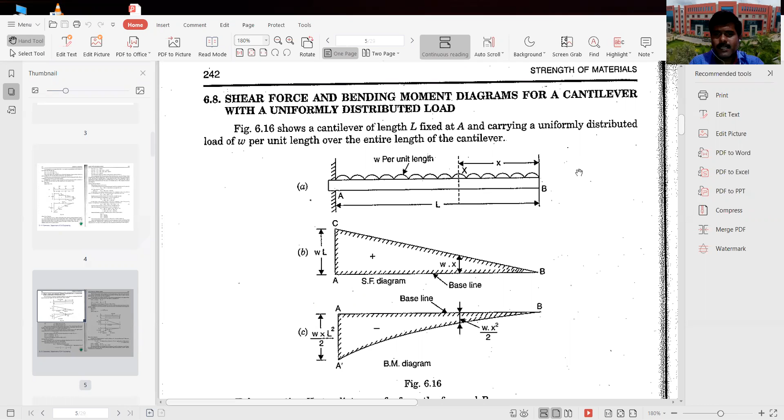In the previous lecture, we discussed the shear force diagram and bending moment diagram for a cantilever beam with a point load. In this lecture, we are going to discuss the shear force and bending moment diagram for a cantilever with a uniformly distributed load.

So you can see this figure: a cantilever beam of length L fixed at point A and carrying a uniformly distributed load of W per unit length over the entire length of the cantilever beam. So this is the cantilever beam which is subjected to uniformly distributed load.

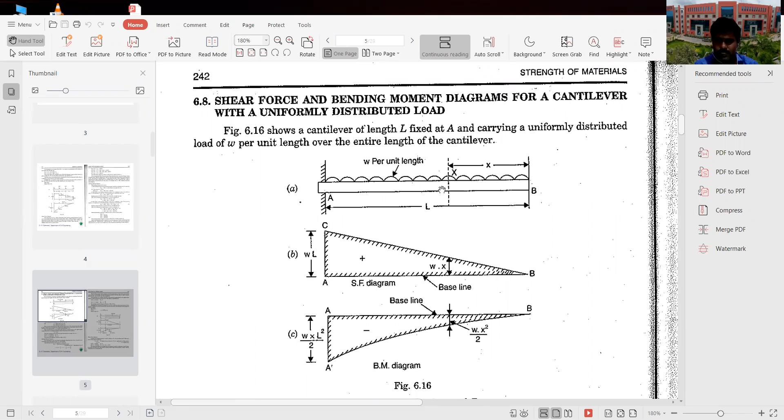So for this we need to know how to draw the shear force diagram and bending moment diagram.

Here you can take a section XX at a distance of X from the free end B. This is the free end and this is the fixed end - fixed end A, free end B. So from the free end B, at a distance of X, you can take a section XX.

Here F of X will be equal to shear force at X, and Mx will be equal to bending moment at X.

Now you need to calculate the shear force. So what is the shear force? Shear force is nothing but when you are taking the section, consider either left side or right side, you just add the force - that force is called shear force. So the algebraic sum of the force acting either left side or right side of the section, if you consider, that is called shear force.

So if you are taking the section here, you just derive the shear force equation, F of X, in terms of X. Wherever the point is - at point B, at point A, here C - wherever you need, if you substitute the distance, you will get the particular shear force value at that point. Now, shear force at X, the XX section, F of X, will be equal to...

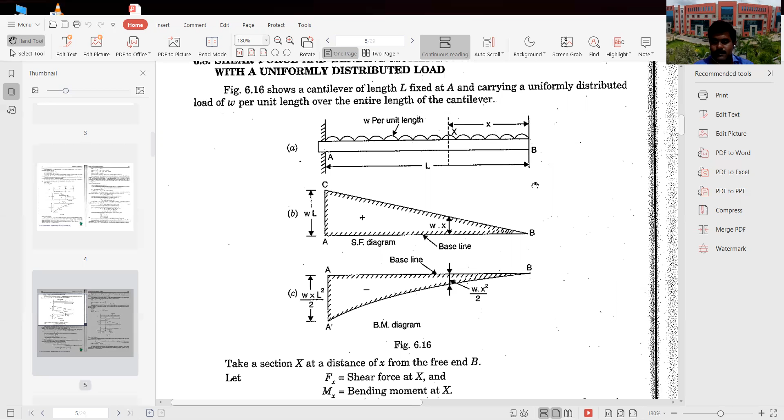So F of X, the resultant force on the right side of the section, will be W into X. Next, you should know whether it is positive or negative. On the right side, the section acts downward, in a clockwise direction. So, as we discussed in earlier lectures regarding sign convention, F of X will be equal to positive, plus Wx.

So the above equation shows that the shear force follows a straight line law. F of X equals W into X, a linear equation in terms of X. Therefore it follows a straight line law.

Now, at point B you need to know what is F at B, the shear force at B. At point A, you need to know what is the shear force at A. So at point B, what is the X distance? Zero.

Hence f of x will be equal to W into 0, 0. At point A, what is the distance? x equal to L, right? So at point A, here 0, here L. So f of x will be equal to W into x, L. So WL.

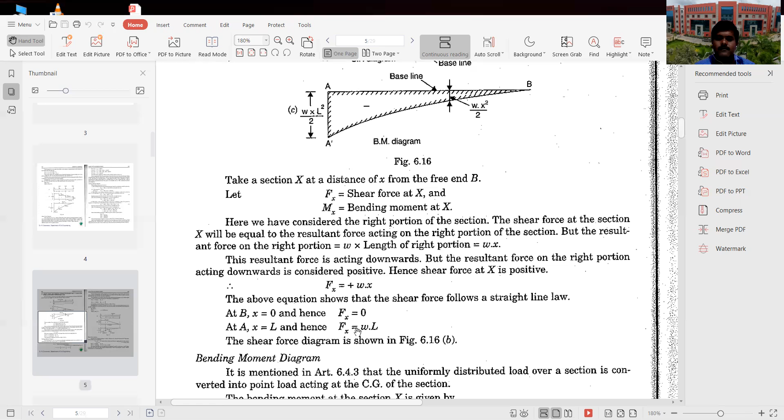So at a distance of x, shear force is Wx. At a distance of 0, at point B, shear force is 0. At a distance of L, point A, the shear force will be W into L. So you can draw the diagram now.

So the shear force diagram you can always draw below the beam, and first draw the baseline AB. Here at point B, the shear force value will be 0. So you can start from 0, and it is Wx, the equation x in terms of x. So straight line, just draw the straight line, and at point A, the shear force value will be WL.

Okay, so this is the shear force diagram. So positive value, therefore you can draw above the baseline, so positive. So when you are calculating the bending moment, you will get the negative value. That's why it's coming below the baseline.

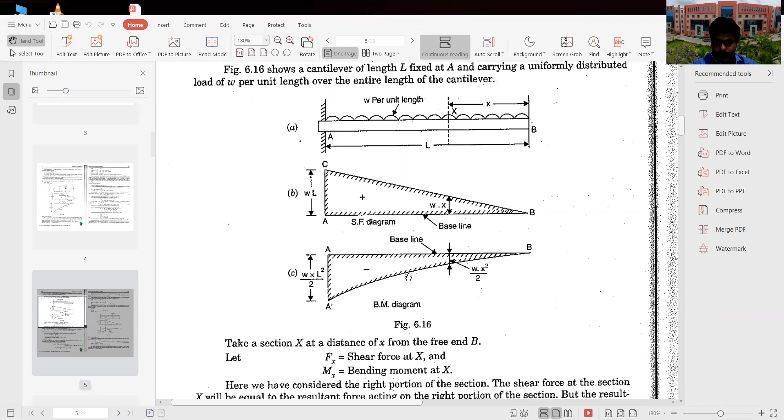So now we can see how to draw the bending moment diagram. So the uniformly distributed load will be converted to the point load, and point load into distance. Load into distance is nothing but moment.

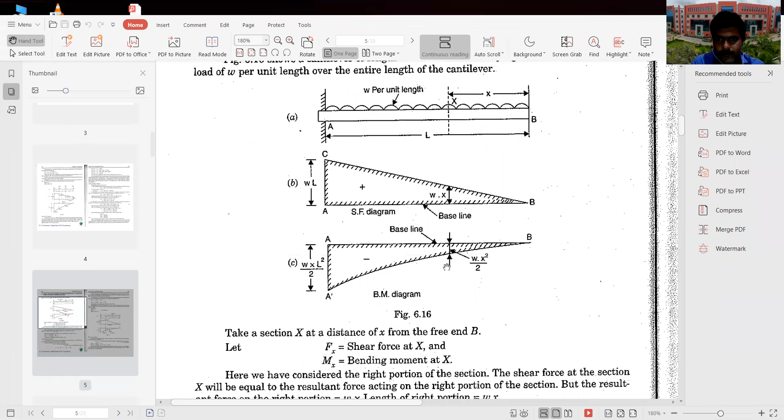So then bending moment at the section xx is given by, okay, you can see here. The bending moment at this section I am calculating. Here what is the load? This UDL converted to the point load, Wx, W into x, and that point load is acting at the center of the section.

So towards this section, if I consider Wx into x by 2, Wx is the load and x by 2 is the distance. The load into distance is the moment at this section. So moment at section Mx will be equal to Wx into x by 2, so Wx square by 2.

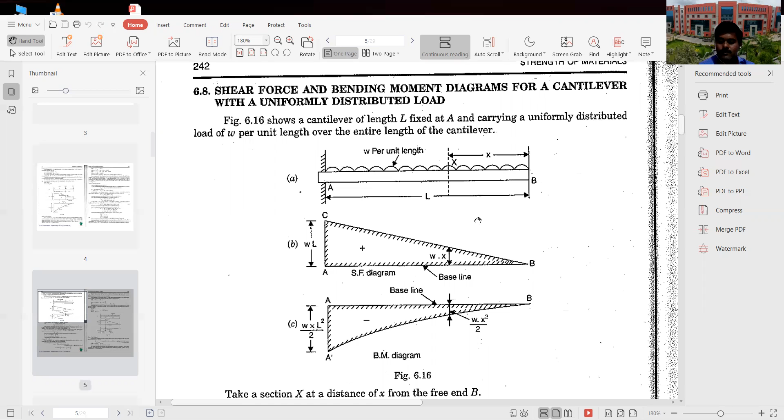So this Wx square by 2 is negative or positive, you have to check. So the section right side has acting downward force. It will come downward like this, like a clockwise moment, and it will lift the beam upward. So the curve will be like hogging, convexity will be at top, therefore hogging, negative bending moment, therefore minus Wx square by 2.

So here you can see the bending moment Mx is equal to minus total load on the right side portion, that is Wx, into distance of CG of the right side, which is x by 2. So Wx into x by 2. Since the beam lifts upward, hogging, so minus Wx into x by 2, which is equal to minus Wx square by 2. So this is the bending moment equation.

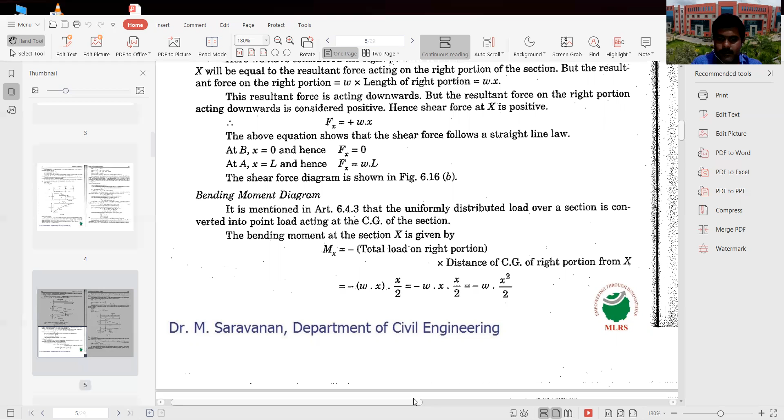Now at point B, if you want point B, the x distance is 0. So 0 square into W, 0 into W, 0. So moment at B will be equal to 0, moment at x will be equal to Wx square by 2, and moment at A will be equal to, at point A the x will be equal to length L, so WL square by 2. Okay, now you can see the diagram.

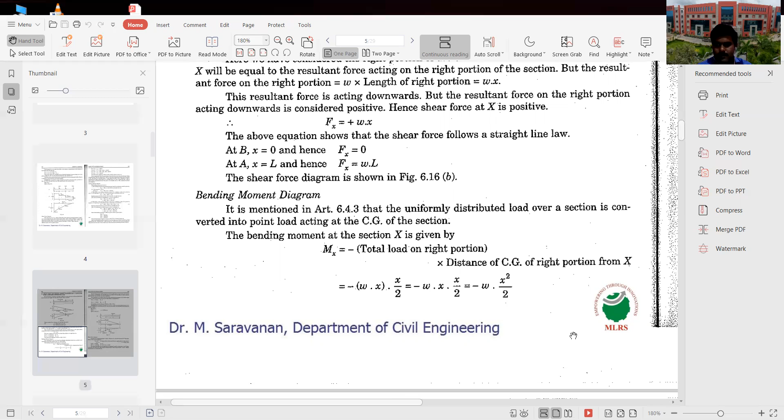So at point B, the bending moment will be 0. As we already discussed, in simply supported beam, the bending moment at the support is 0. Similarly, in the cantilever beam, bending moment at the free end is 0. As in this problem also you can see here at B, free end, bending moment 0. At point A, the bending moment value will be WL square by 2. At x distance, Wx square by 2.

So wherever you suppose, let's say L is equal to 5 meters. At a distance of 1 meter, bending moment W1 square by 2. At a distance of 2 meters, W2 square by 2. At a distance of 3 meters, W3 square. At a distance of 5 meters, W5 square by 2. So like that, wherever you need to know the bending moment value, the ordinates, you just substitute the length in terms of x, and you will get the bending moment value.

So you can draw the bending moment diagram using these ordinates. Here you can see the equation is Wx, a linear equation, therefore straight line. Here it is not a linear equation, x square equation, therefore parabolic. So based on the equation only, you have to decide whether to draw it linearly, or parabolic, or cubic parabolic.

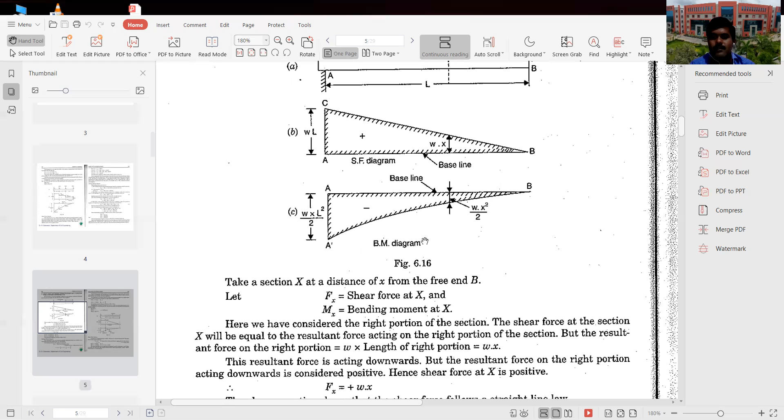Suppose the equation, your derived equation at the x section, is linear in terms of x, then you can draw a straight line. If your derived equation at the section x-axis is in terms of x square, then you can draw a parabolic curve. Suppose your derived equation is in terms of x cube, like Wx cube by 2, Wx cube by 3, then you can draw the cubic parabola. So that also you should consider while drawing the shear force and bending moment diagram.

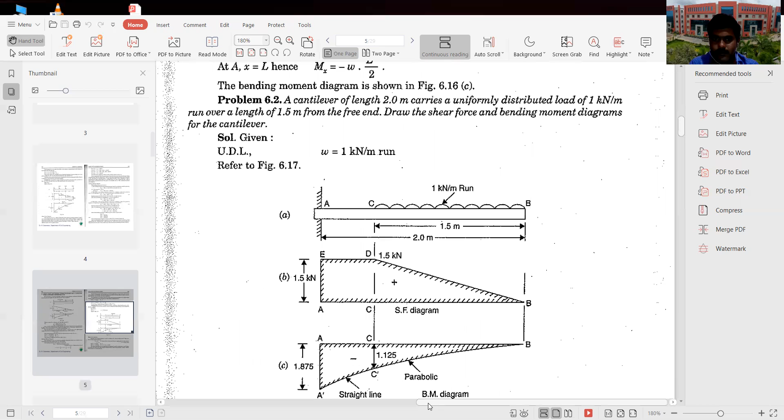And you can see here, so at x equal to 0, moment at x equal to 0, and at x equal to l, so m is Wl square by 2.

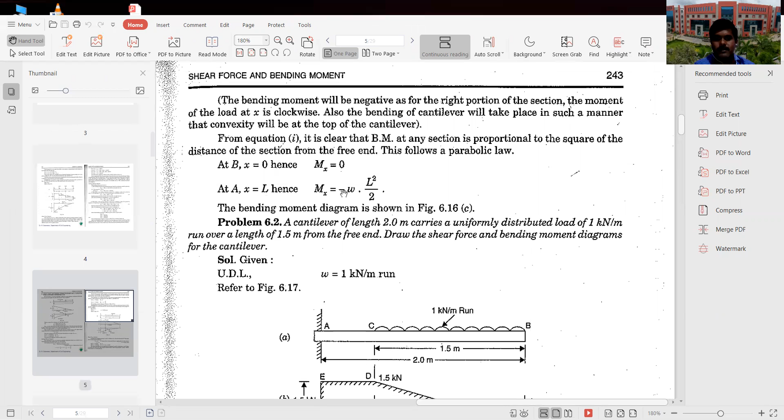Okay, next you can see this problem. A cantilever beam of length 2 meter carries a uniformly distributed load of 1 kilonewton per meter run over a length of 1.5 meter from the free end. Draw the shear force and bending moment diagram for the cantilever beam.

So here a cantilever beam is given. From the free end, at a distance of 1.5 meter, the uniformly distributed load is running. The load value is 1 kilonewton per meter, and the total length of the beam is given as 2 meter. Now you need to draw the shear force diagram and bending moment diagram.

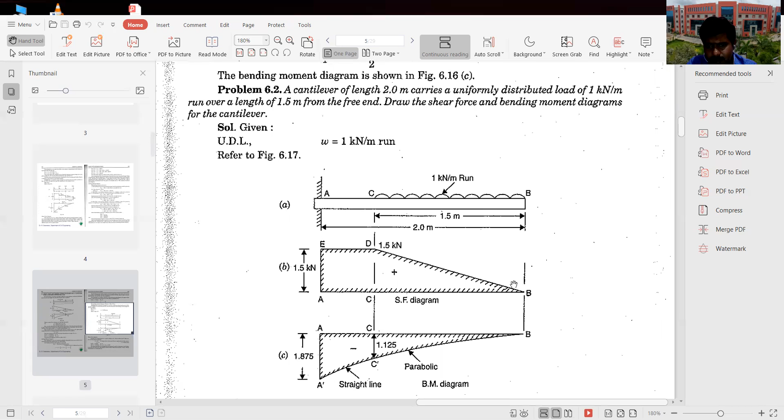So you know, where load is available, the shear force value changes, and where there is no load, it is constant. Now we can see how to draw the shear force diagram.

As usual, if you want to find the shear force, you consider a section. Suppose you want to draw the shear force between C and B, so you consider the section between C and B, and find f of x as one equation. Then substitute x at B and at C to get the values.

Suppose you want to draw the shear force between A and C, you have to consider the section between A and C. But here no need, since whatever value you got up to point C will remain constant up to A, because there is no load there.

Now we can see f of x. Suppose I take the section here between C and B. The load W acts downward, and since it is UDL, converting to point load gives W into distance x. If I take the section at x here, it is W into x, acting downward, which is like a clockwise moment. So for the section, right side downward force acting clockwise is positive for shear force.

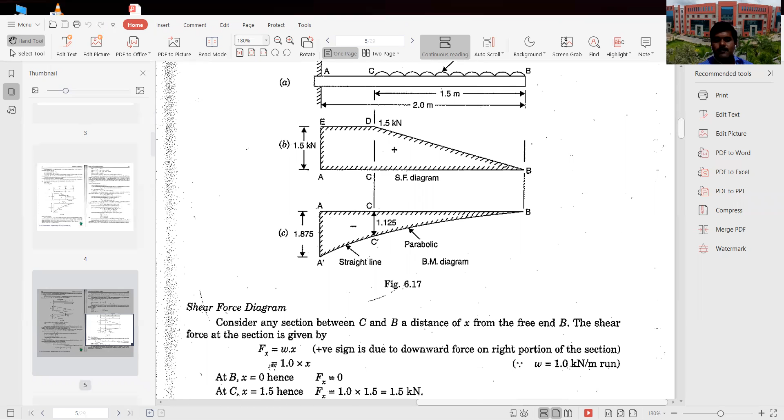So f of x is equal to Wx. Here W value is 1, so 1 into x, therefore f of x is equal to x. That is the derived equation, f of x equal to x.

Now you need to know at point B what is the shear force. At point B, x equal to 0, therefore substitute x equal to 0 into f of x, so f of x will be 0.

At point C, x equal to 1.5 meter. So f of x is equal to W into x, that is 1 into 1.5, so 1.5 kilonewton at point C.

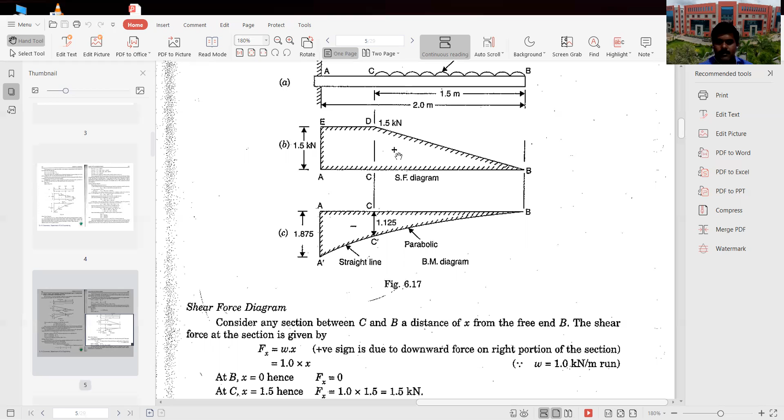It is Wx which is a linear equation, therefore a straight line, from 0 it increases to 1.5. Then after that there is no load, therefore it is a horizontal constant line, drawn up to point E. So this is the shear force diagram, and since it is a positive value, you draw it above the baseline.

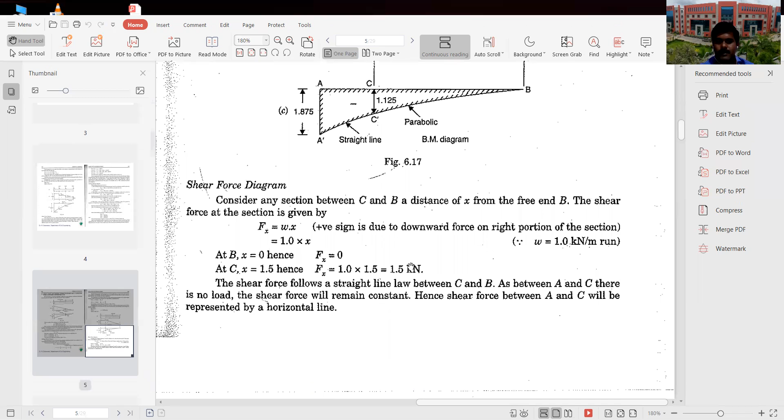Next you can see the bending moment diagram. Similarly, what you have to do is take the section between C and B and find the moment at x. So moment at x is equal to load into perpendicular distance. So what is the load?

UDL convert to the point load, W into x acting at the center of the section. So Wx into x by 2, in between C and B, the section x, Mx is equal to Wx into x by 2. Is this positive or negative? Section, right side downward force, looking like a clockwise moment, and it lifts the beam upward. So the curve will be like convexity at the top, hogging.

So negative, minus Wx squared by 2. If you want bending moment at point B, substitute W into X is equal to 0. So W into 0 square gives 0 value, bending moment value is 0. Then at point C, W is 1, so 1 into X at point C, X value 1.5, so 1 into 1.5 square divided by 2.

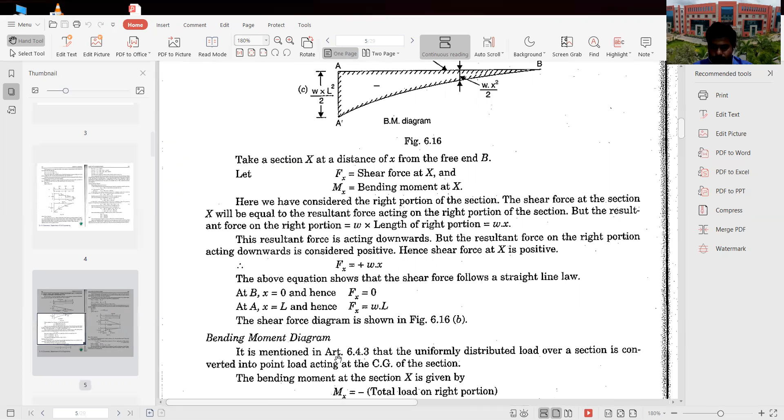Okay, so now we can see the calculation. Moment at X, so W into X square by 2, where W is 1. So X square by 2 is the equation. At B, X equal to 0, so M at B equal to 0. At C, X equal to 1.5, so MC is equal to 1.5 square by 2, so minus 1.125 Newton meter.

Similarly, if you want to calculate the bending moment between A and C, you have to take the section between A and C at a distance of X from the free end B. So total UDL will be W into 1.5, so 1.5 kilonewton is the load, acting at a distance of 1.5 divided by 2.

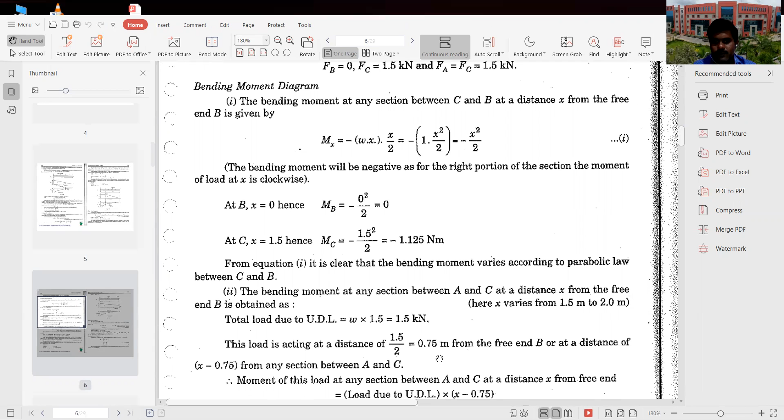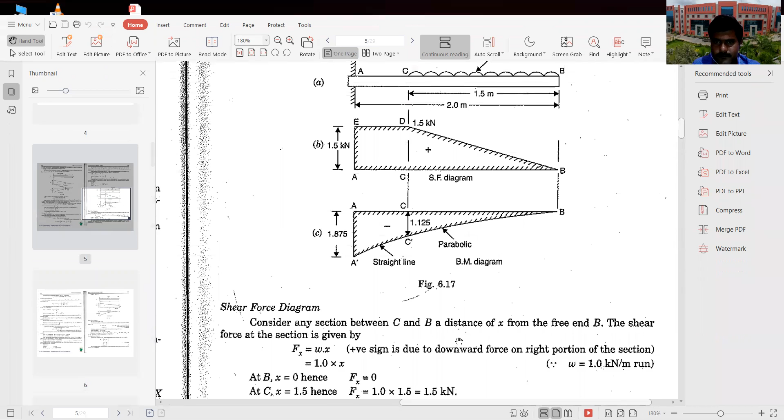So here you can see this figure, you can understand. Here between A and C, I am taking the section to draw the bending moment diagram between A and C. So up to that I know X square, so parabolic curve. So here 0, here 1.125 minus, so downward parabolic curve up to this. And between A and C, I have to draw this one, whether it is a straight line or parabolic, or what equation I have to frame.

So for that, between A and C, I can draw the section XX. So here load into distance. This load is nothing but converting this UDL to the point load. So 1 kilonewton per meter into this length 1.5, total load is 1.5 kilonewton, acting at the center here.

Okay, I am taking the section here, so the distance is from here to this section X. The load is acting here, that is 1.5 divided by 2 distance from the free end, meaning center of the load. So the section from the B free end has distance X, and X minus the load acting distance, which is 1.5 by 2, so 0.75. So X minus 0.75 I can consider as the distance.

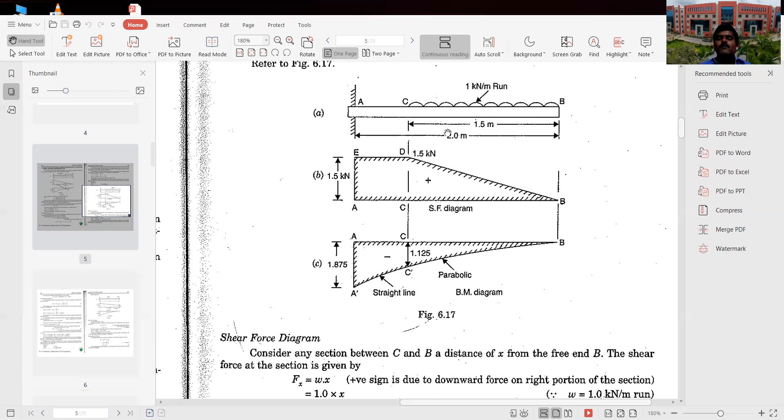So this load is acting at distance X minus 0.75 from the section. The load is 1.5 into distance X minus 0.75, which is the bending moment. If I take the section between A and C, considering moment as load into distance, the load is centrally acting, so 1.5 into X minus 0.75 is the equation. Now, using the sign convention, clockwise lifting the beam upward is negative, so the equation is minus 1.5 into X minus 0.75.

Now at point C, I need to calculate the moment, so X equal to 1.5 meter distance at point C. Moment at C equal to minus 1.5 into 1.5 minus 0.75, so minus 1.125, which we already calculated, so this equation also confirms it. Similarly at A, X equal to 2 meters, so moment at A equal to minus 1.5 into 2 minus 0.75, so minus 1.875 Newton meter.

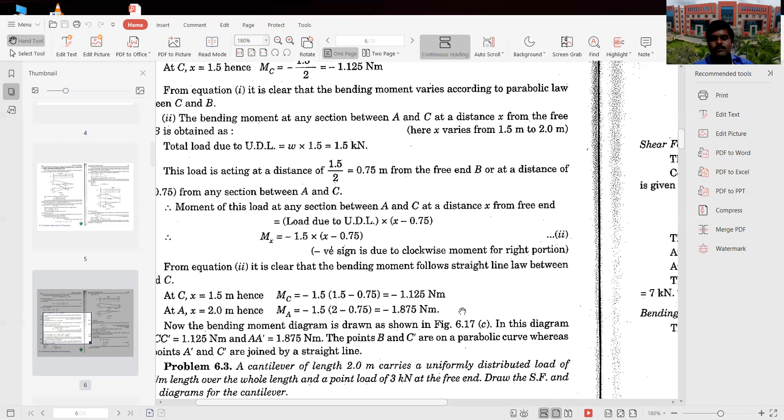So you can able to draw the diagram. Here at 0, at 1.5 meter distance 1.125 negative, at A, 2 meter distance 1.875 negative, downward minus, so downward. The equation here is 1.5 into X minus 0.75, which is linear in terms of x, therefore this part is a straight line, not parabolic. Here with the x square equation, therefore this part is parabolic.

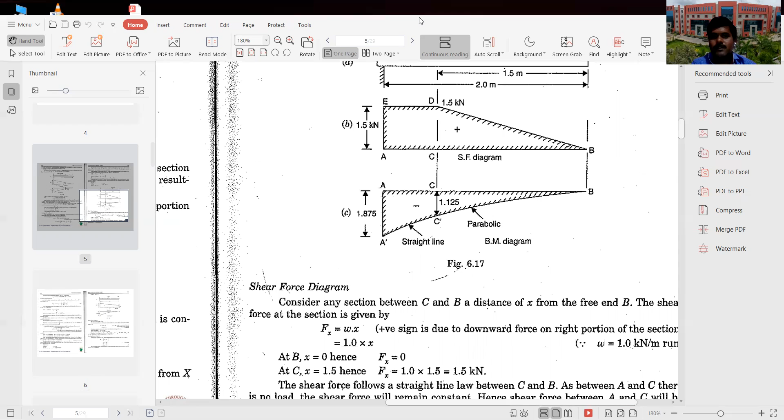Okay, so this is how you have to draw the shear force diagram and bending moment diagram for a cantilever beam subjected to uniformly distributed load. I hope you understand.